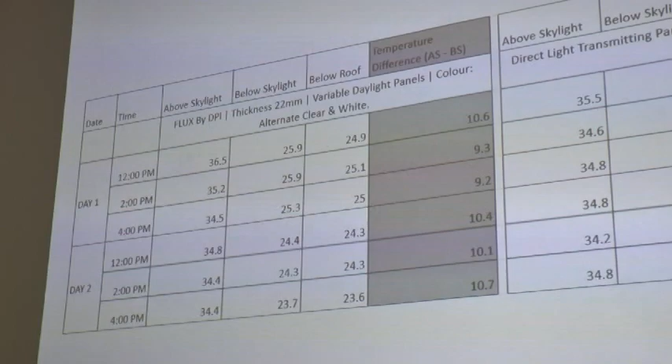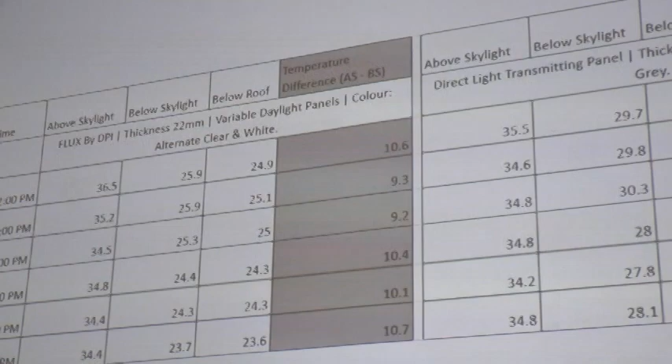This is Inorbit Vashi. This data was recorded by Inorbit Vashi.

Like on day 1 and day 2, if you see at 12 p.m., the outside temperature above the skylight was 36.5 degrees. Below the skylight, that is under the roof, it was 25.9 degrees, and they also measured under the RCC roof, which was 24.9 - hardly 1 degree more than the RCC roof. Due to this, the HVAC loads stay in the normal range and they save so much on electricity. This data was shared by Inorbit Vashi with us, just to praise the product.

There are different colors available, and the darker ones, if you see, these are the louvers. Those are co-extruded into the panel. These darker ones are the color options.

This is our flux data sheet. If you see, the U value is very low, varying only from 1.4 to 2.5 watts per meter square Kelvin. The SHGC, the solar heat gain coefficient, is also very low, from 0.2 to 0.4, which gives a very ambient temperature under the roof for any type of climate.

Like in Nagpur - let's take the example of Nagpur, because we have the harshest summers - this is the main point. I give you a warranty of 10 years on the product, and our light transmission does not decrease more than 6%, even after 10 years, which speaks to the quality of the product.

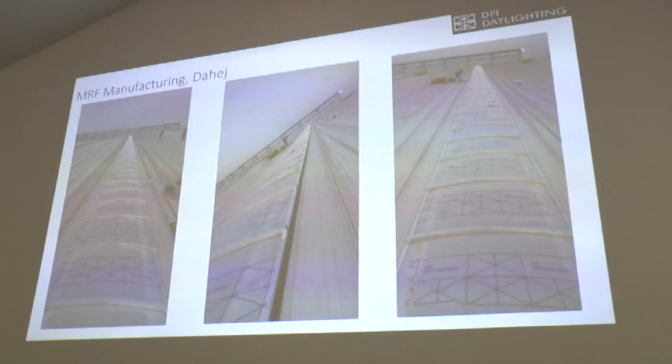Then we move to industrial projects, industrial skylights. This skylight we have designed specially for MRF, Dahej plant. It's designed at 4 kPa wind load, which is very good because Dahej is near the sea and there's a cyclone effect every 2-3 years. So they wanted the skylights designed at 4 kPa wind load with an absolutely dry system. We have not used silicone, nothing anywhere, and it's absolutely leak proof. They are very happy and are giving us the next project in Trichy, a 100-meter one-side slope.

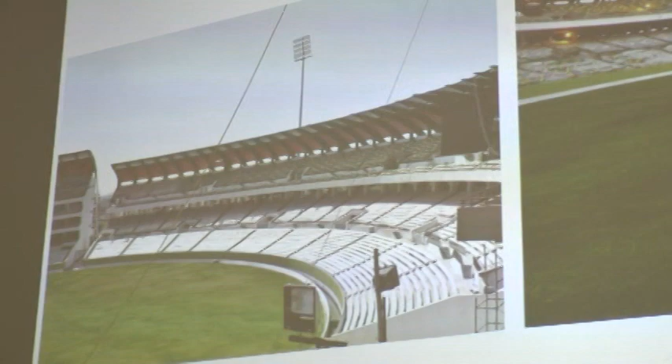Then we have done these cricket stadiums. This is an extended roof, and this is a normal galvanized roof. Why extended roof? Because if you use galvanized here at the end, the sunlight is not reaching the grass, so without photosynthesis the grass is dying. We started discussions with VCA, who had the same problem using a totally galvanized roof, needing to replace the grass every time a match is announced because it dies from lack of photosynthesis. Here, because it allows good ambient daylight, photosynthesis happens and the grass stays alive. That's the best part of using this in stadiums.

Pictures of the stadium.

We have also done this Jio Garden Reliance canopy structure.

In this particular segment of construction materials, no other product, no tiles, no false ceiling, nothing has received this award until today. We have received it, which is a proud moment for us.

We have tested the products for every type of scenario, like dart drop impact and impact resistance, for example a monkey jumping from a tree onto the roof. The panel should not break even though it creates so much impact. We have test certificates from CIPET Chennai and IIT Roorkee for all the required tests, even for the pull-out loads of the fasteners we use, like 7,000 newtons per fastener.

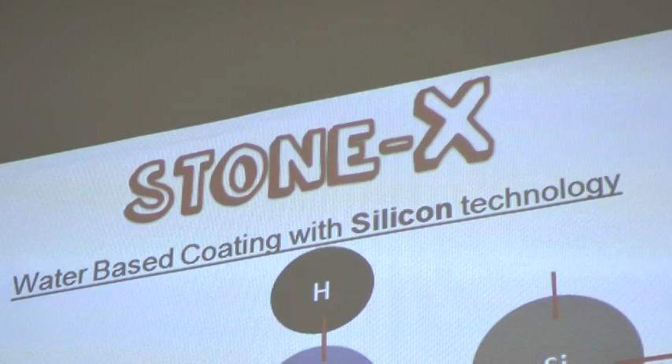It is eco-friendly with a VOC content of 55 grams per liter, and having excellent UV resistance. It cannot decompose in UV rays. It has excellent water repellency due to this structure, so we get an excellent beading effect on the surface.

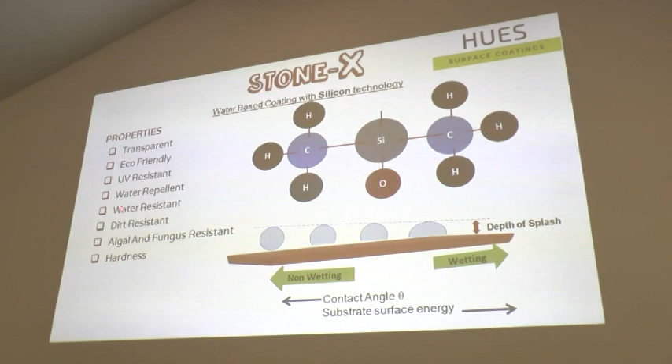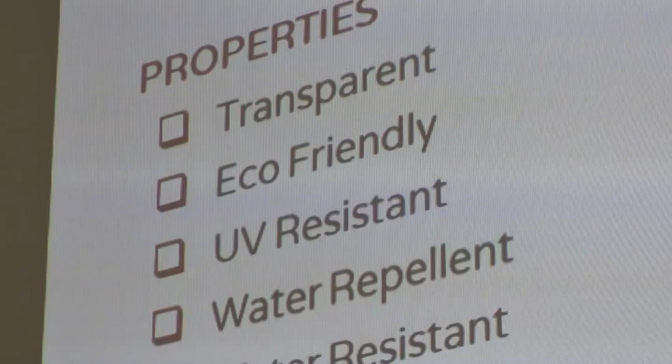Next is excellent water resistance. This product has very excellent initial water resistance, so you can wash it as well.

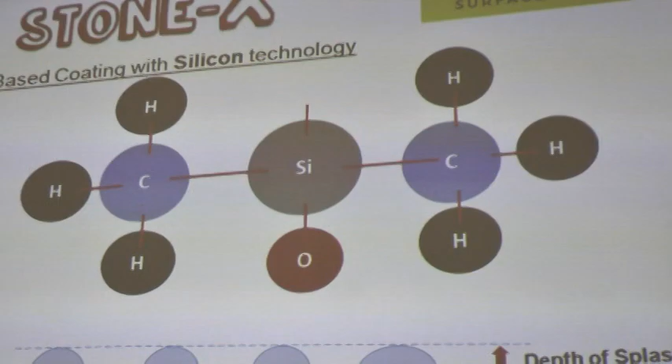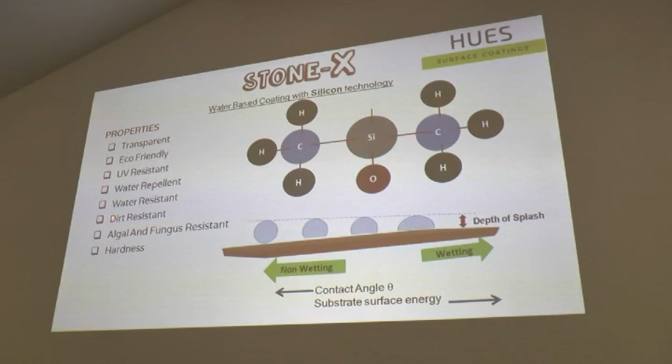Next, the dirt resistance is also very good as compared to traditional wax-based technology, because with wax-based technology the dirt will attack. This dirt resistance is very good.

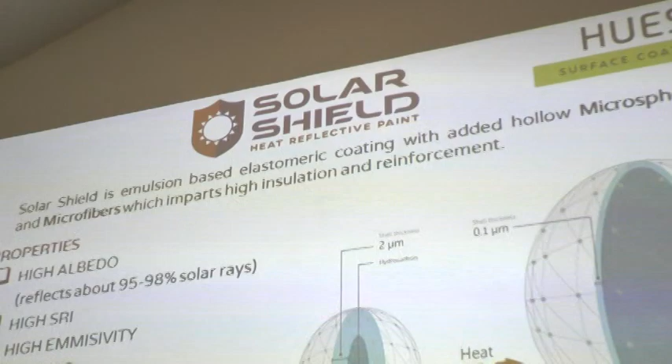So the next product is the Solar Shield. It is a high albedo paint, which has 95 to 98% solar reflection in it.

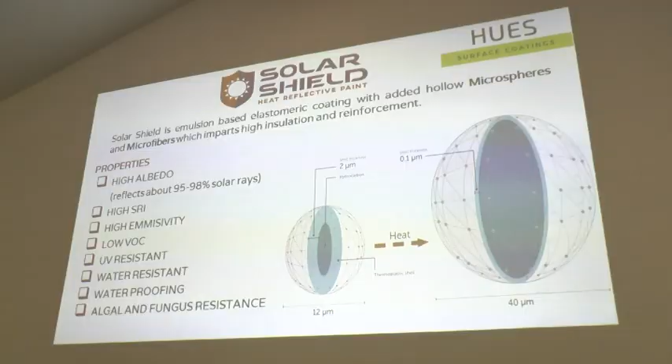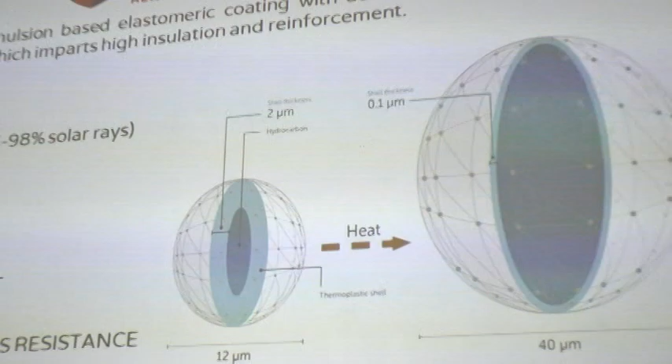And the second property, the VOC content, is 44 grams per liter. So it has a green seal label, as per the US EPA agency.

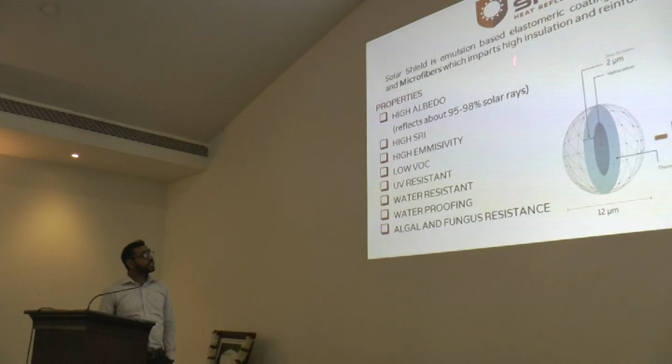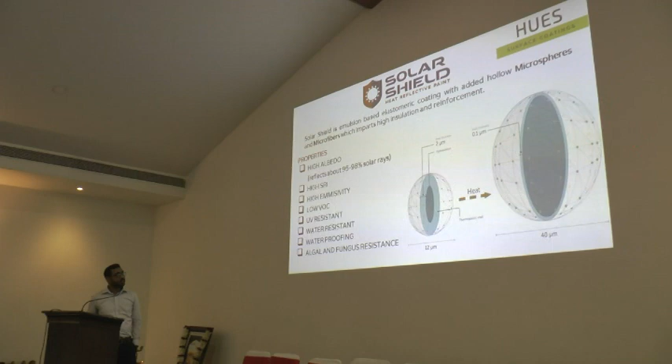The second one is the UV resistant structure, which we are adding in it. This microsphere, when the temperature rises, will expand, increase in size, and act as an insulator.

These are the advantages: reduce surface and interior temperature, reduce heat island effect in urban areas because there is increased heat in urban areas, and help in conforming to green building standards. For green building projects, you can use this product.

The recommended coverage is 2 to 2.8, because the thickness is very important — 150 to 200 microns thickness should be there. It is not to be used near airports.

This coating will produce flare, so during landing it will distract the pilot. It is also not to be used near communication facilities, because it will interrupt the signals and cause noise.

Application areas are roof applications, temple walkways, sidewalks, schoolyards, and exposed parking lots, because to reduce this urban heat effect, you can use these spaces.

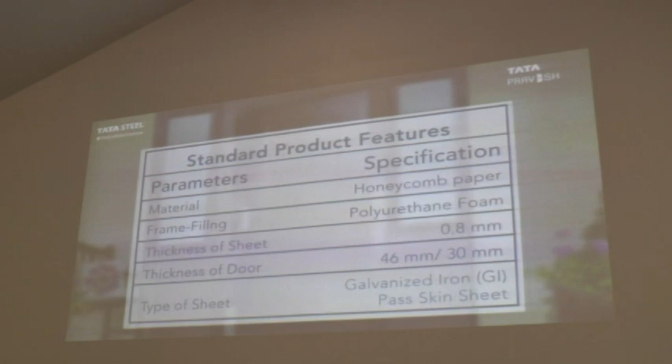The world of Tata Steel is one without boundaries, growing, changing and challenging a world that embraces the company's portfolio of innovative product solutions: Tata Pravesh Doors and Windows. They have the strength of steel with the elegance of wood. Made from high-grade steel with state-of-the-art technology, these doors and windows are suitable for both residential and commercial spaces.

The residential range includes embossed and plain wood finish doors in 8 wood grain finishes. Fly mesh doors are also offered to keep insects at bay. We offer plain steel doors in 11 RAL shades. They can be used as main doors, bathroom doors, bedroom doors, etc., in addition to various commercial applications.

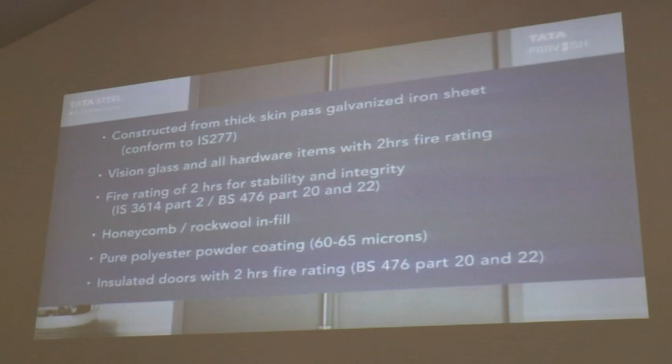Apart from this, our range of commercial doors include vision panel doors, lumiere doors, full glass door and egress doors. We also offer fire-rated doors that are designed to provide fire protection for 2 hours. These doors have been tested and certified by accredited authorities. With a robust structure, our fire-rated doors offer various superior features.

These doors come with a 5-year warranty on manufacturing defects, termite infestation, and color and texture fading.

Apart from doors, our stunning range of steel and aluminum windows promise durability with aesthetic appeal. The Oyster variant has a steel casement along with clear float vision glass, a safety grille, and is available in wood finish. They come with a complete set of accessories. The single rebate variant includes grille and glass and can have up to 4 shutters. The double rebate variant has an additional fly mesh which keeps insects away.

The canvas range consists of sliding and casement aluminum windows. These are made of factory-made aluminum with high sheet thickness that lends both strength and durability. Glass and metal profiles are selected to withstand wind pressure. The high-grade rubber gaskets are leakage-proof and offer better thermal insulation. Powder coating of 60 to 80 microns and high-quality fabrication give the windows superior finish. Rust-proof, retractable mesh and hardware make the windows maintenance-free.

Vista comes with a dual swing and slide functionality that offers up to 95% clear opening. Vista windows have twin gas springs to withstand high wind pressure and dampen any rattling sound. Special PU foam gasket prevents rainwater seepage and provides better thermal insulation. Vista windows are IS 1038 certified and are available in 4 standard sizes.

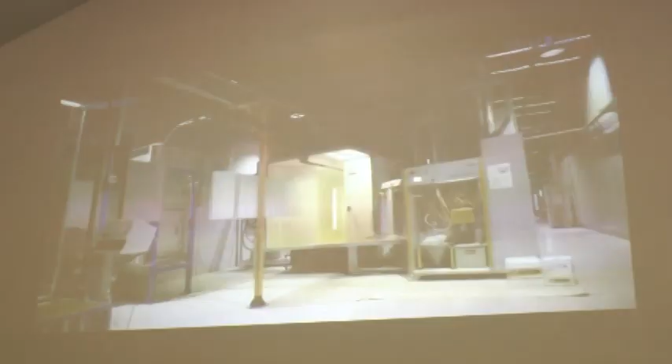Let's see the key advantages of using canvas windows from Pravesh. The canvas windows are tougher, precipitation hardened in a heat treatment technique, increasing the yield strength.

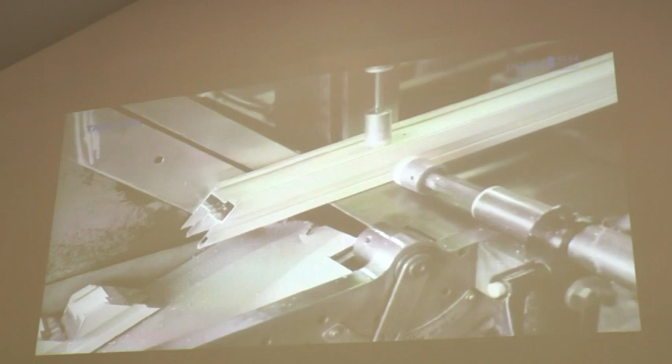High-grade metal allows for good cuts and finishes, and the metal profile is selected with consideration of strength and wind pressure factors. The powder coating used is from a leading Norwegian chemicals company and a Dutch multinational company, both renowned worldwide for paints and performance coating for industrial and commercial applications.

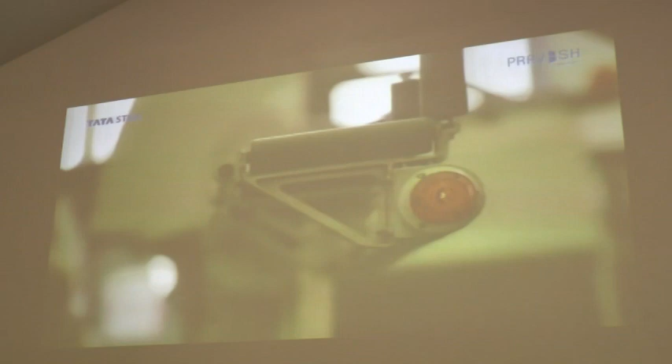All products go through tape testing and hammer testing for durability and come with a 5-year warranty. All fabrication also comes with a 5-year warranty, as hairline jointing and CNC machine manufacturing processes are deployed with pre-programmed computer software dictating the manufacturing process, ensuring optimal quality output.

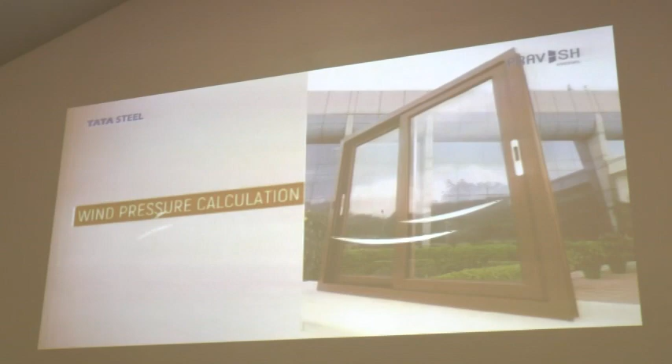Toughened glass is used in all products as wind pressure calculation is factored in for thickness of glass, making it secure and all-weatherproof, with clear float, tinted, Karachi and frosted finishes.

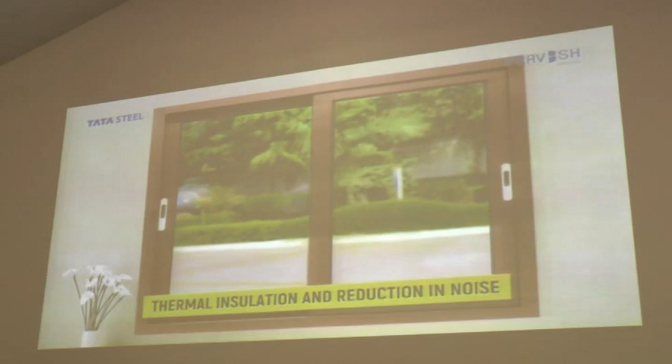High-grade EPDM rubber gaskets are used on all fixtures to prevent leakages and heating, which is better for thermal insulation and reduction in noise due to friction created during usage.

High-grade stainless steel fly mesh is used in the mesh variant windows that come with grills, glass and fly mesh, and is highly rust resistant and designed for insect and fly control. Finally, high quality hardware stainless steel screws are used for their superior quality, durability and longevity.

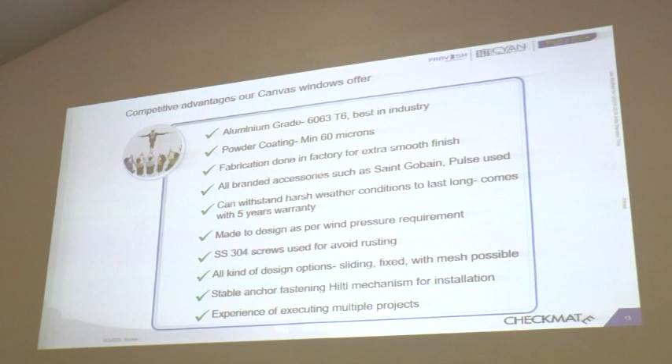As we saw, the aluminum sliding windows have ultimate strength, hairline jointing and other features also.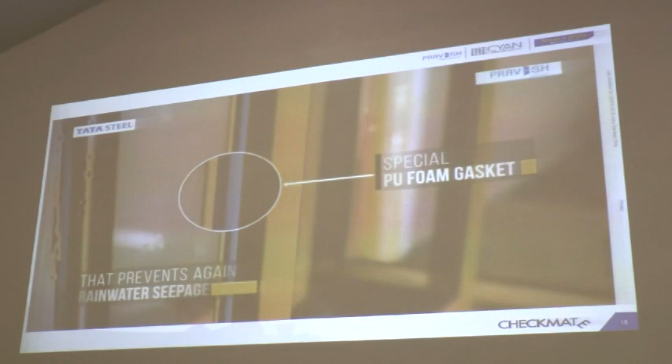Tata Steel Pravesh introduces Vista, a range of steel windows made of galvanized steel with UV resistance. It's easy to clean compared to standard windows, with easily accessible glasses, and its custom-made steel channel flushes water, thus preventing dust accumulation. Every window has a special PU foam gasket that prevents rainwater seepage.

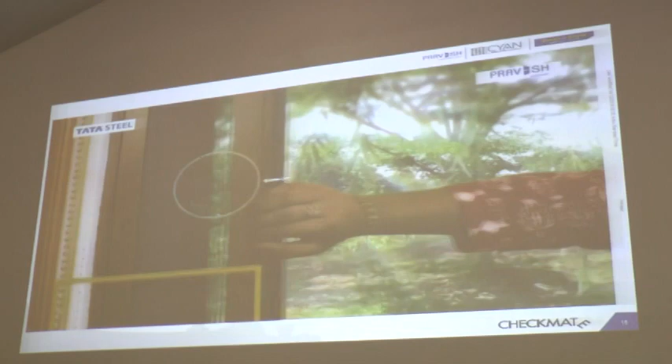Vista windows, designed to withstand high wind pressure, are fitted with twin gas springs, brass style bolts with SS plates, stainless steel lift-off hinges, heavy-duty hanging rollers, and attractive brass handles. What's more, choose your Vista windows with a wide range of decorative frames, add-on grills, and retractable mosquito nets, giving an elegant and premium look.

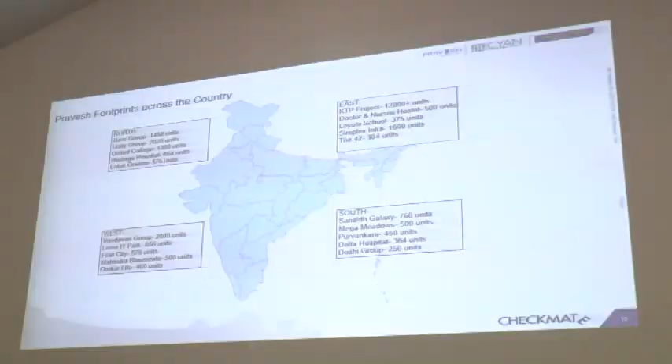We have manufacturing facilities in 3 states: a 15,000 doors facility in Hyderabad, 15,000 doors and windows in Baddi, and a 2,500 doors facility in Chandigarh. Along with that, we have a dedicated installation team, and a monitoring, training and evaluation backend team for execution. We have more than 140 service partners across India to serve the projects.

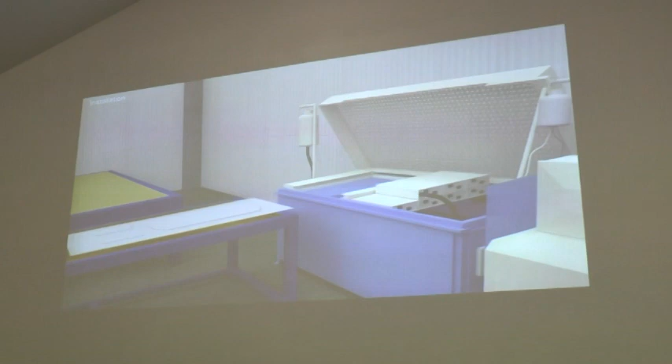Just have a look at the installation process. The manufacturing of Pravesh includes cut out, lock cut out, and peephole cut out.

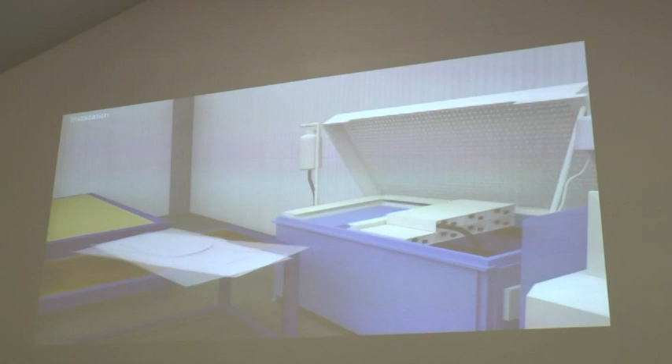Once punching is done, the edges of the top lid of the door are rolled forward to a 180-degree angle in such a manner that it overlaps the pan of the door. In the next step, it goes for a bending operation on the frame sheet and shutter bottom sheet.

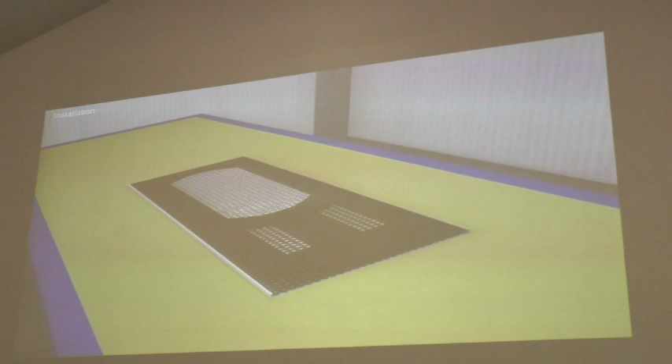The sheet next undergoes various welding operations in MIG and spot welding machines. This is followed by gluing and filling, where the honeycomb paper filling is put between the 2 sheets. This increases the strength of the door.

In the next step, the top lid is joined and sent to a hot press for proper bonding. Spot welding of the top and bottom ends with C sections is carried out. The door is now completely formed.

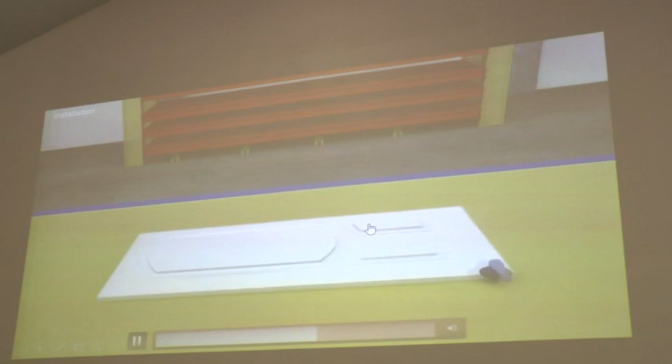The next procedure undertaken is buffing, where gentle grinding is done to remove welded spots and welding marks on the door. The finished door surface is cleaned with solvent to remove dust and oil, and sent for powder coating.

After powder coating is done, the door is put in an oven for curing at 200 degrees centigrade for 10 minutes. Design paper is now pasted on the shutter and frame, and the door is vacuum pressed in an oven.

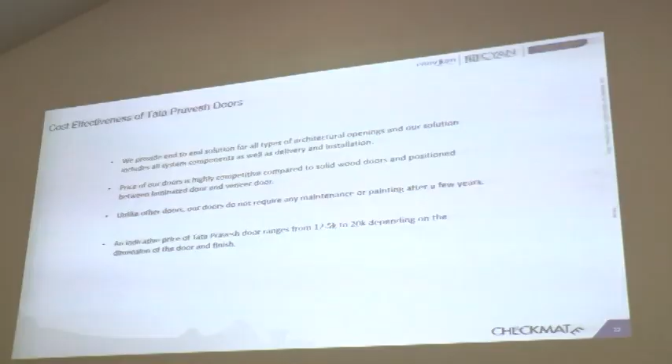We are running out of time, so I am keeping this video short. Tata Pravesh is very much cost effective.

With your support, we are now enlisted in Maharashtra PWD SSR from this year, and we are looking forward to further kind cooperation from you all to reach a new height.